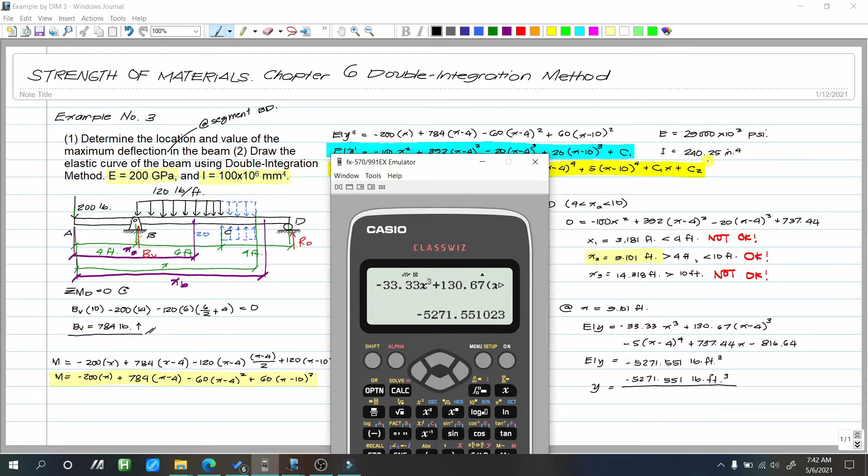Kasi ang E and I natin is gigapascal and millimeter to the fourth. So, i-convert na lang natin siya into PSI, and ito gawin natin siyang inch to the fourth. Okay, so yung sinearch ko sa internet, yung 200 gigapascal is almost equal to 29,000 times 10 raised to 3 PSI. And yung ating I na 100 times 10 raised to 6 millimeter to the fourth is equivalent to 240.25 inch to the fourth.

So, kung i-convert rin natin yung 100 times 10 raised to 6, that is millimeter. Divide natin ng 1,000, then i-multiply natin ng 3.28 para maging feet. Para maging inches naman, i-multiply natin ng 12. Wait lang. Okay, so yung ating E in PSI is 29,000 times 10 raised to 3, and yung ating I is 240.25 inch to the fourth.

Okay, so yan yung nasa internet. Pwede rin naman, convert natin yung 100 times 10 raised to 6 into meter, raised to 4 din. Then, convert natin ng feet, so 3.28 to the fourth. Then, multiply natin ng 12 para maging inch to the fourth. So, 240, malapit-lapit. Naka-round off na kasi siya, sa internet na siya. So, anyway, pwede rin naman 240 na lang para mas eksakto.

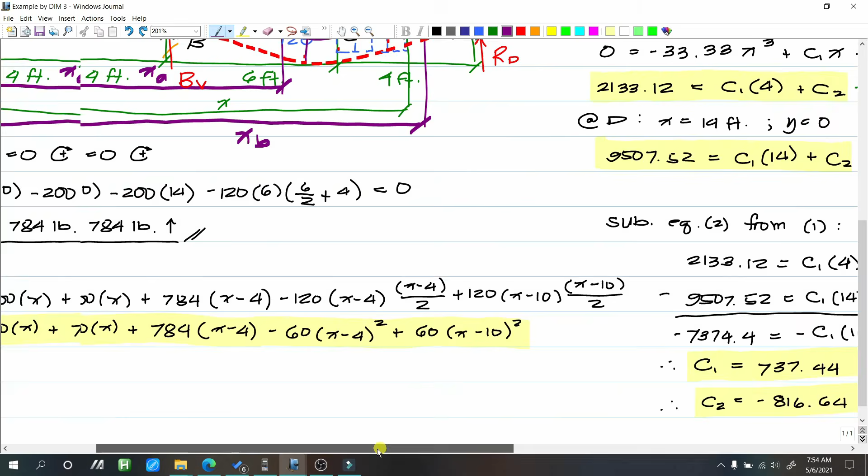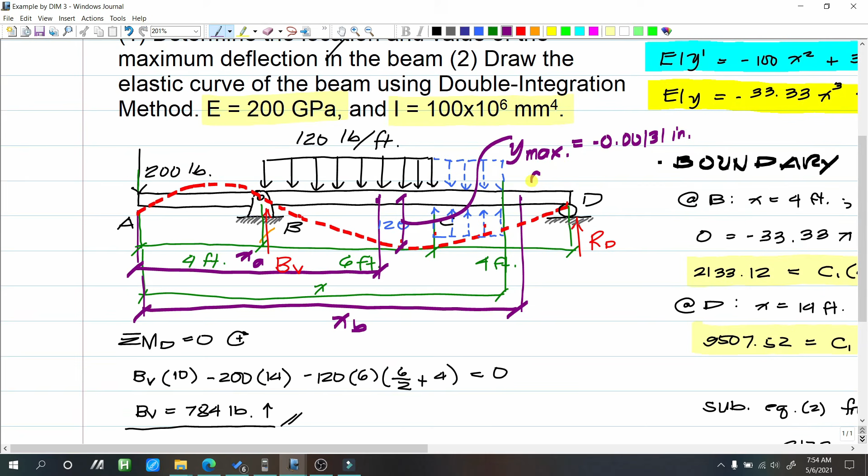Okay, so, ayan siya. Okay, so this is our example number 3 for chapter 6, double integration method.